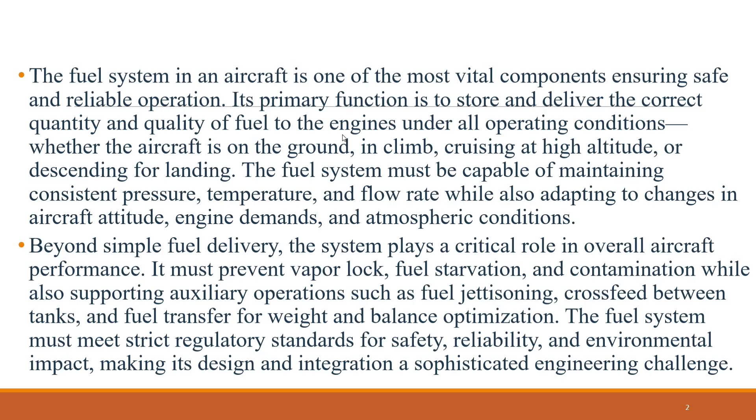Role and importance of the fuel system in aircraft operation. The fuel system's importance lies not just in powering the engine, but also in enabling aircraft to meet performance goals such as range, endurance, and payload capacity. The system has to work flawlessly at varying altitudes, where pressure and temperature differ significantly, and must continue to deliver fuel under conditions of turbulence, icing, or rapid changes in power demand.

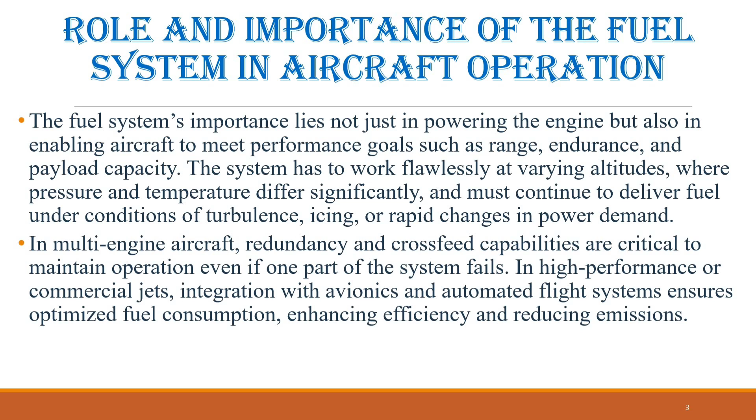In multi-engine aircraft, redundancy and cross-feed capabilities are critical to maintain operation, even if one part of the system fails. In high-performance or commercial jets, integration with avionics and automated flight systems ensures optimized fuel consumption, enhancing efficiency and reducing emissions. Safety is paramount in aviation, and fuel system failures have historically been major contributors to incidents and accidents. Hence, modern systems incorporate multiple fail-safes, pressure relief valves, contamination monitoring, and real-time diagnostics to detect irregularities early.

Overview of basic fuel system layout and flow path. Although the specific layout of a fuel system can vary significantly depending on the type and size of the aircraft, there are several common components and flow sequences that define a standard architecture. Fuel is typically stored in tanks that are integrated into the wings, fuselage, or sometimes the empennage, tail section. From the tanks, fuel is drawn through a series of lines by boost pumps, either electric or engine-driven. These pumps ensure fuel reaches the engines even under high demand or when gravity feed is insufficient.

The fuel then passes through filters that remove water and particulate contamination before reaching the engine-driven fuel pump. This pump raises the fuel pressure to meet engine requirements. From there, fuel flows through the Fuel Control Unit, FCU, where it is metered based on throttle inputs, altitude, and engine load. Finally, the fuel is injected into the combustion chamber for ignition.

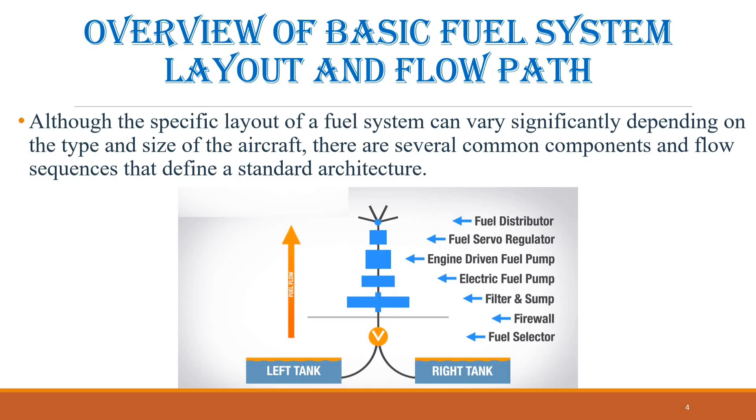In more complex aircraft, additional components such as fuel transfer pumps, selector valves, crossfeed valves, and fuel heaters are included to manage fuel routing, balancing, and thermal conditions. Venting systems are used to maintain pressure equilibrium in the tanks, while sensors monitor fuel quantity, temperature, and flow rate.

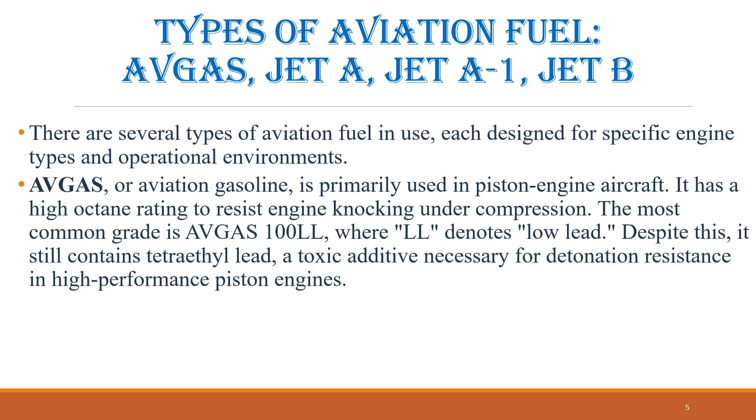Types of aviation fuel. There are several types of aviation fuel in use, each designed for specific engine types and operational environments. Avgas, or aviation gasoline, is primarily used in piston engine aircraft. It has a high octane rating to resist engine knocking under compression. The most common grade is Avgas 100LL, where LL denotes low lead. Despite this, it still contains tetraethyl lead, a toxic additive necessary for detonation resistance in high-performance piston engines.

Jet fuels are used in turbine-powered aircraft, including turbojets, turbofans, and turboprops. Jet A is a kerosene-based fuel commonly used in the United States. It has a high flash point and relatively low volatility, making it safer to handle. However, its freezing point of approximately minus 40 degrees Celsius limits its use in extremely cold conditions. Jet A1 is an internationally used variant with a lower freezing point of around minus 47 degrees Celsius. This makes it more suitable for long-haul, high-altitude flights where outside air temperatures can drop significantly.

Jet B is a blend of kerosene and gasoline, designed for extremely cold environments such as the Arctic. It has a lower flash point and higher volatility than Jet A or Jet A1, allowing for easier ignition at low temperatures, but posing greater fire risk during handling. Jet B is less commonly used and is typically reserved for military or specialized operations.

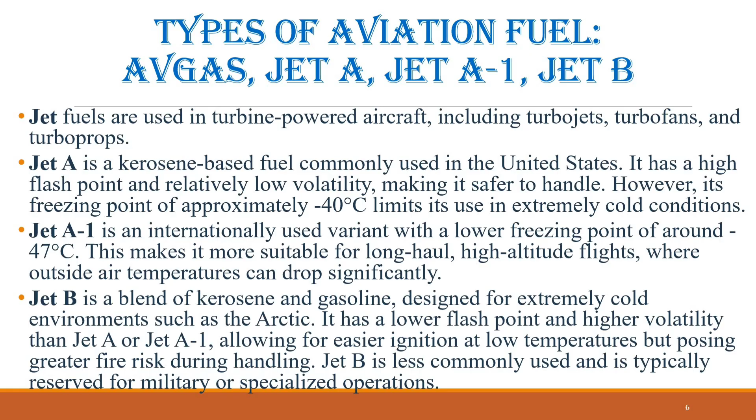Fuel properties, grades, additives, and impact on system design. The properties of aviation fuel directly influence fuel system design.

Important properties include volatility, density, viscosity, flash point, and freezing point. Each of these characteristics affects how the fuel flows, ignites, and is stored. Volatility determines how easily a fuel vaporizes, which is critical for combustion and startup, especially in cold conditions. High volatility fuels are easier to ignite but are more prone to vapor lock. Conversely, low volatility fuels like Jet A require more robust pressurization and heating systems.

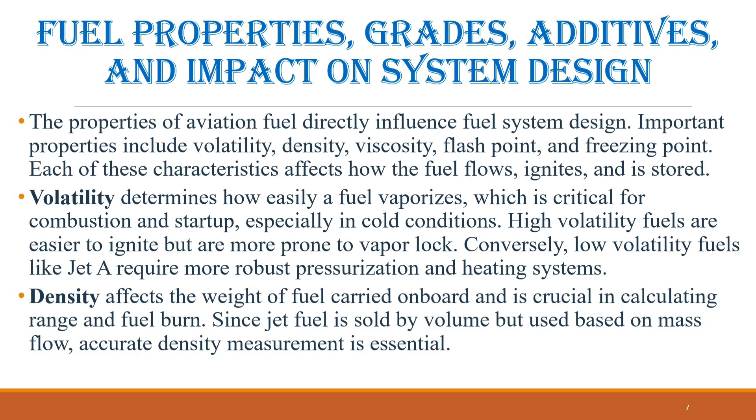Density affects the weight of fuel carried on board and is crucial in calculating range and fuel burn. Since jet fuel is sold by volume but used based on mass flow, accurate density measurement is essential. Viscosity impacts how fuel flows through pumps and lines. In colder temperatures, viscosity increases, which can hinder flow. Fuel heaters or additives may be necessary in such cases.

The flash point is the temperature at which fuel vapors can ignite. Jet fuels have higher flash points than gasoline, making them safer for handling. The freezing point defines the temperature below which fuel may solidify or wax, potentially blocking filters or lines. This is why Jet A1 and Jet B are used in cold weather operations.

Additives are often mixed into fuel to enhance performance and safety. Anti-icing additives such as fuel system icing inhibitor (FSII) prevent ice crystals from forming in the fuel lines. Corrosion inhibitors extend the life of metallic components. Static dissipators prevent buildup of static electricity, which could lead to sparks. Biocides may be used to prevent microbial growth in tanks, particularly in humid or tropical environments.

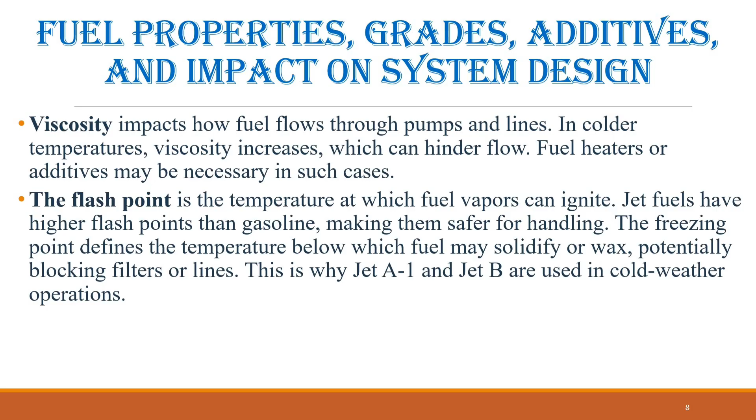All these fuel characteristics dictate material selection for tanks and piping, filter sizing, pressure ratings of pumps, and sensor design. The entire fuel system must be engineered to operate effectively across a broad range of operational conditions. System integration with engine performance and aircraft operations.

In modern aircraft, the fuel system is not a standalone subsystem, but is tightly integrated with the engine control and flight management systems. The Fuel Control Unit, FCU, plays a central role in metering fuel flow to maintain the desired thrust output. It adjusts fuel delivery based on pilot inputs, engine speed, altitude, air temperature, and load demands.

The fuel system also interfaces with avionics to provide real-time data on fuel quantity, temperature, pressure, and consumption rates. This information is essential for flight planning and in-flight decision-making. For example, the Flight Management System (FMS) uses fuel flow data to calculate optimal cruising altitudes, predict arrival fuel, and suggest diversions if necessary.

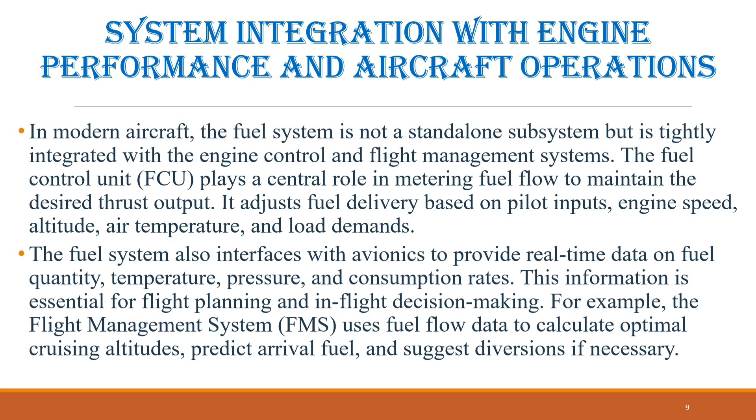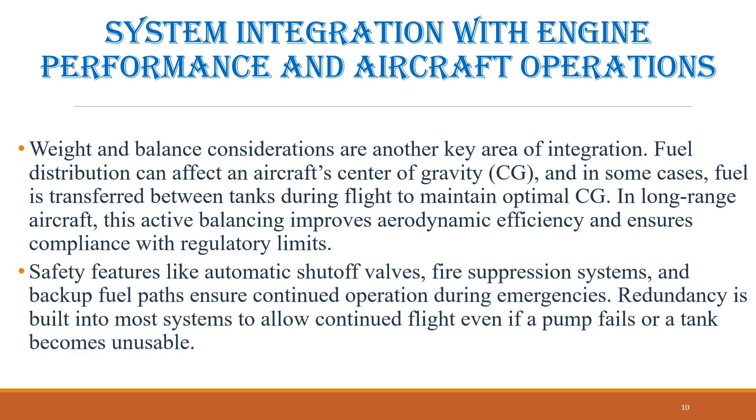Safety features like automatic shut-off valves, fire suppression systems, and backup fuel paths ensure continued operation during emergencies. Redundancy is built into most systems to allow continued flight, even if a pump fails or a tank becomes unusable. Ultimately, the fuel system is designed not only to support the engine's operation, but to contribute to the broader goals of fuel efficiency, performance optimization, safety, and regulatory compliance. Its successful operation is essential for modern aviation.

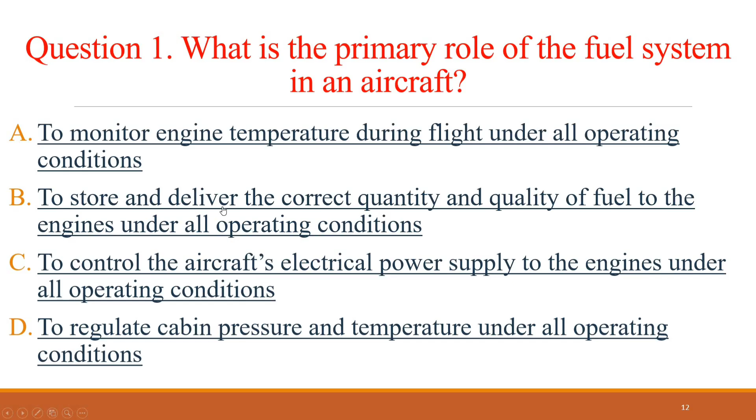Okay guys, now let's have a little quiz. The quiz consists of 3 questions. I'll give you 10 seconds for each one, and then I'll show you the correct answer. Let's start with the first question. Question 1. What is the primary role of the fuel system in an aircraft? The correct answer is to store and deliver the correct quantity and quality of fuel to the engines under all operating conditions.